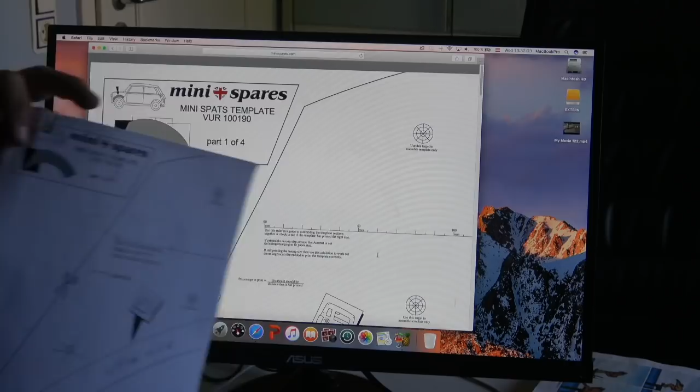So I've got here, you'll see this is the 4 sheets that go together. So here, sorry, it's not really good, the light. So here you've got the line where you cut down, so this is the bit you have to cut out, and it's showing you here where the holes should be.

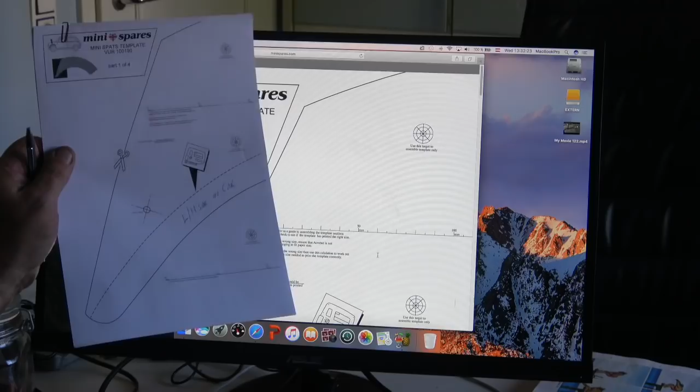And I tend to use those, but I also use the arch that you're putting on as well, just to double check it. And you might notice there I've put left hand side in car, so as you sit in the car you know this is the left hand arch.

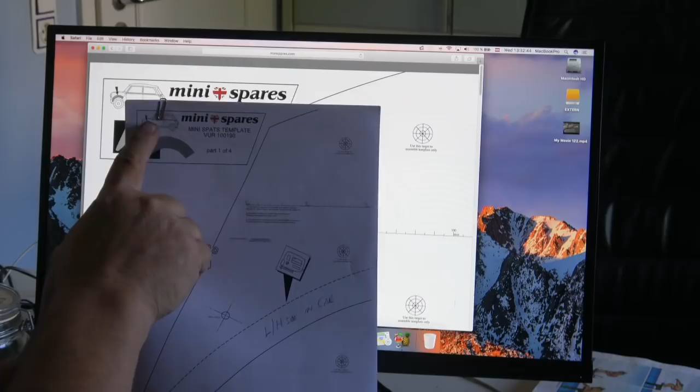The reason I put it in there is because obviously once you cut this, you can see that there is a drawing there of the picture, and you can see there's the left hand front up to the A panel. But if you've already cut this piece out, you don't have it, so it's always handy to just put it in so you don't get confused and put the wrong side and the wrong way around.

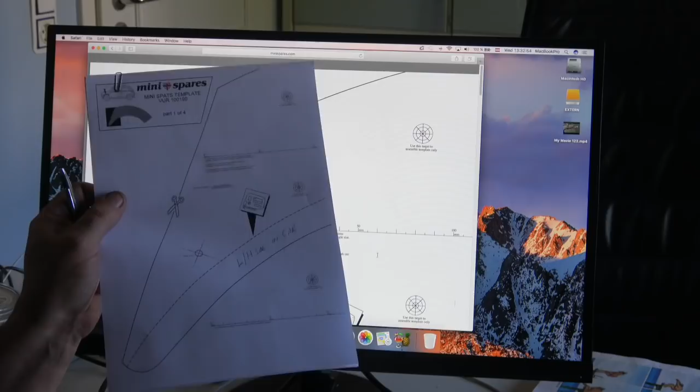Because again with this, it's measured 2 or 3 times and cut only once. Because once you've cut this piece of the arch out, that's it. You're committed, as it were.

And this is basically the A-frame of it. You can see it's the A-frame, and it's part 1 of 2. So there's 2 pieces that go on, and these are to line up directly onto it.

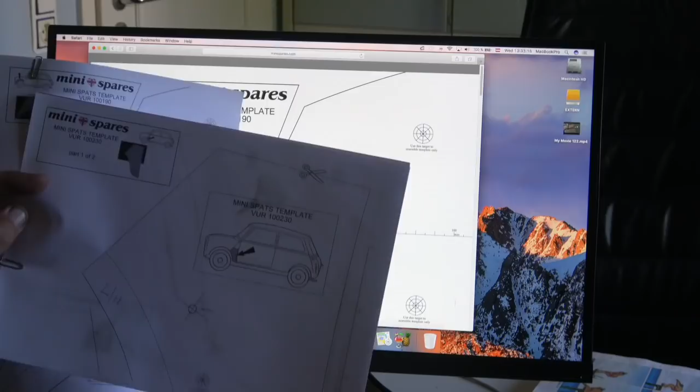That's how it's done. So what we'll do, we'll go through the whole process. The first thing you want to do is get your templates made and then cut out, and then I'll take you down to the workshop.

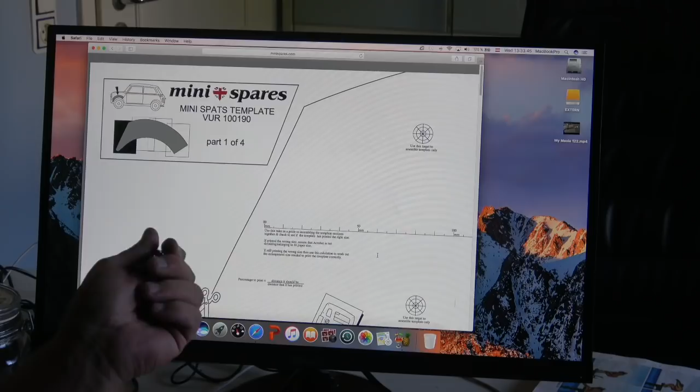The next piece will be, I'll take you down to the workshop, I'll show us marking this out, putting the strengtheners up against it just to make sure they fit correctly, the arch is correct. And then we'll cut them out and put them on and weld them in place, just one side, and it's obviously the same.

With the rear arches there's a bit of an issue, because if you take this to the rear arch, you don't need to cut. I'll take you on to the rear arch so you can see it.

There's nothing needs to be cut out on the rear arches, because on the rear they're fine. It's only because when you've got taller wheels, or 12-13 inch wheels, but you tend to have bigger, like 6.5, 7J tyres, and this is what catches on the front.

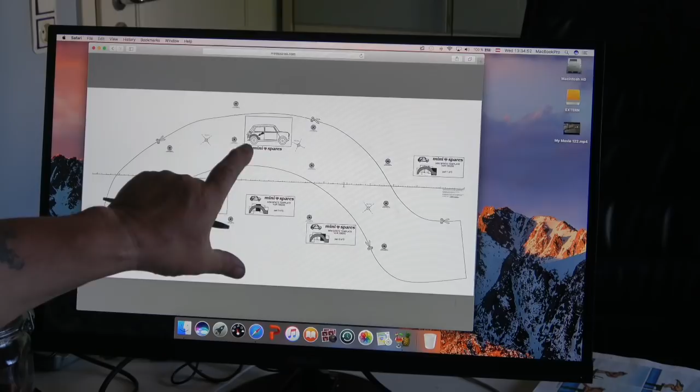So on the rear there's no issue because they're staying perpendicular to the car, but this is just to show where they should actually go. But the problem with this one is you have to scale it over, unless you've got a sheet that big, which is A2 or A1, whatever it is. To put it on an A4 sheet, you have to work out how you need to do that.

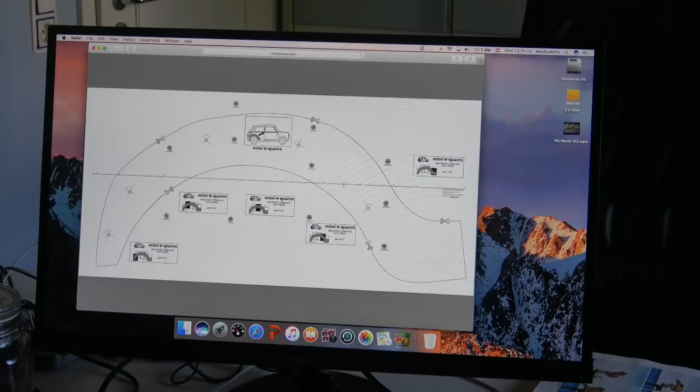But you don't need it, because I tend to use the wheel arches and fit them up myself, because the fitting on the rear arches are the most important, down here and here on the seam lip, and that's really where you need to get it right, to get the holes right for the attachments, and a lot of it's a little bit of trial and error. So that's the start of it.

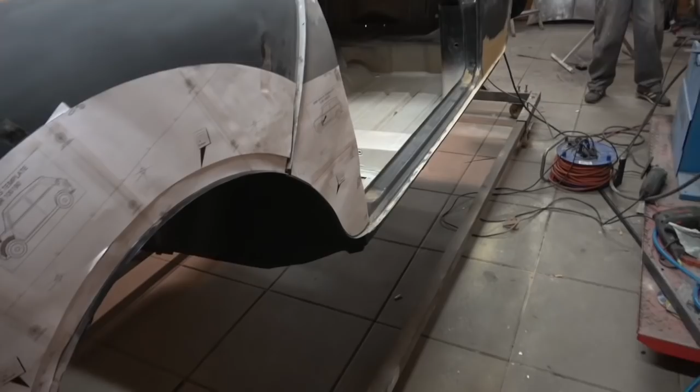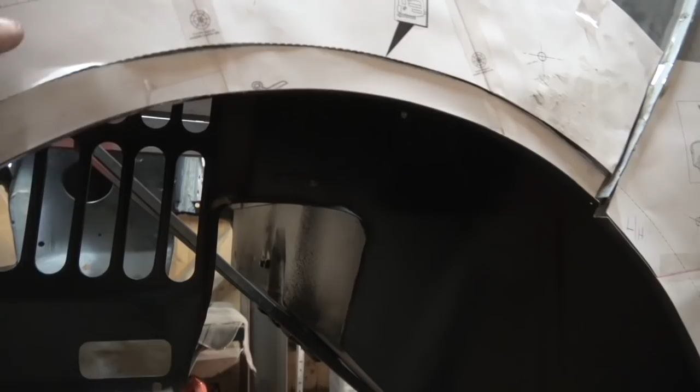Okay, so you saw me on the computer with a PDF file. So this is them all done, and you can see they're all lined up together there, all these points. So what I did was I actually cut this piece out, because obviously you need to make the line behind it, which we've already done. So you can see that's all in. You can see that's the reference point there and there.

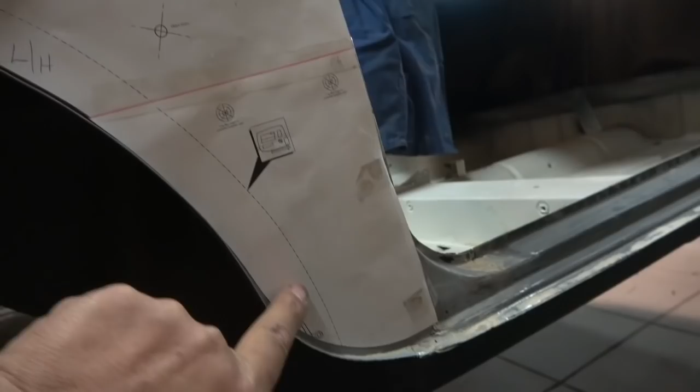So this one has to be cut out now, so we can draw a line into it. So I'll take this one up so I can show you. And then we don't need that one again. And you can see we've put a white line behind this one, up to there. So that's what needs to be cut out.

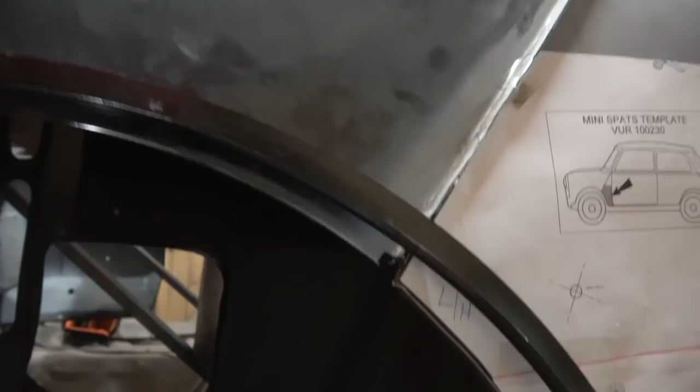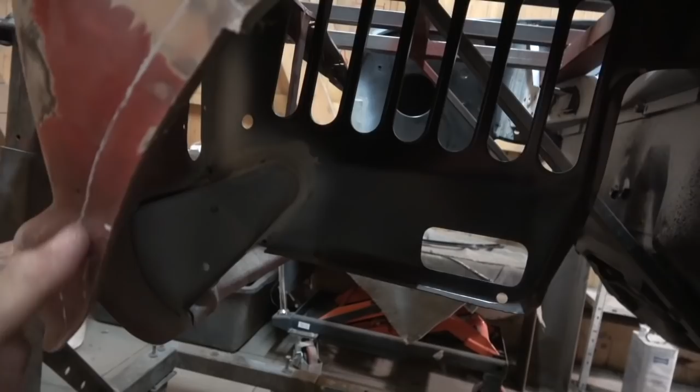And if you look, it's actually not too far off this. It's good, this is obviously just a strengthening. You can see how much more it needs from that. The other thing with this is, if you look here on the front, it gets a bit tricky - you can see there's a double bow there, and obviously this edging is not going to go around it.

So when you put it on, you need to get this absolutely central. Sorry, I'm trying to hold the camera as well. You need to get this absolute - hang on, I'll get Mia to hold it. Hang on, just grab my fingers.

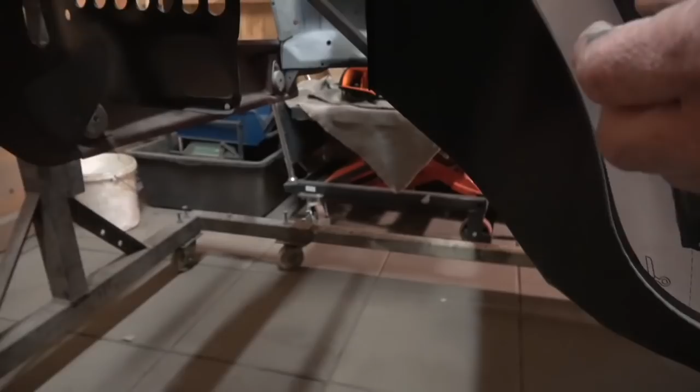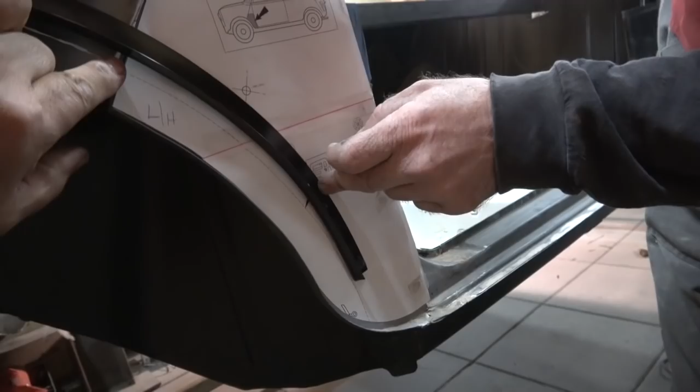So you can see here it can't go down over this piece, so it can only go so far. So you can see that obviously this bit's holding it up here. What we'll do is we'll cut this off, and then I'll cut this one out first. We'll mark that, and you can see that's how it's going to be. It's actually down a bit, but like that.

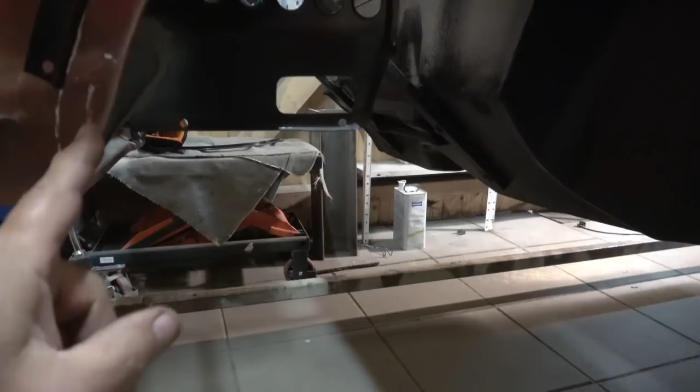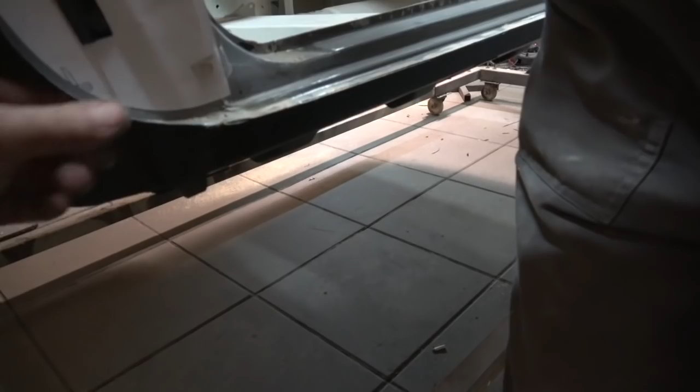But you can't go too far here because you've got to cut this piece out. But you can see I've made another little line there, that's enough to make the other returned edge and bring it round. On this bottom piece, what you find is you cut this piece out of the arch, and you can then put it - otherwise it comes down and it's horrible on this corner. So what I did with mine, the other car, is I took this piece out and filleted this corner into it, so I had a really nice shape when it was finished.

Right, so I'm going to get and we'll cut it out. We'll show you us cutting it out with the jigsaw.

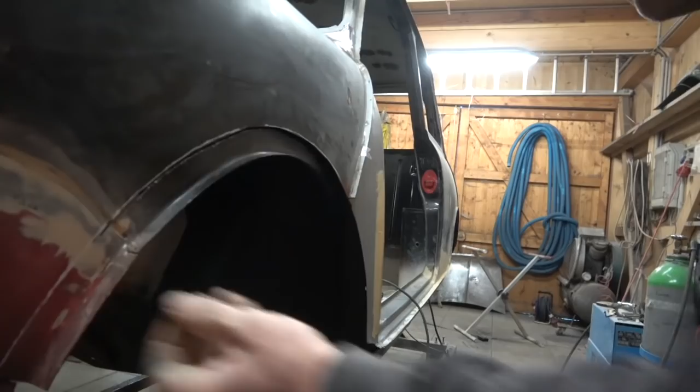Okay, see when you pull that, that's another thing - if you're doing this guys, don't pull the jigsaw right while it's moving, because it'll jag against the thing. Wait until it stops and then pull it out. So you can see this is where he finished off the lead loading for here, so this should be a beautiful end now, hopefully. So what we're going to do now is take that piece out, and we're sorted.

And you can see that's a pretty nice cut all the way through. I don't know if you want to - do you want to do it in one, or should we take the grinder to it?

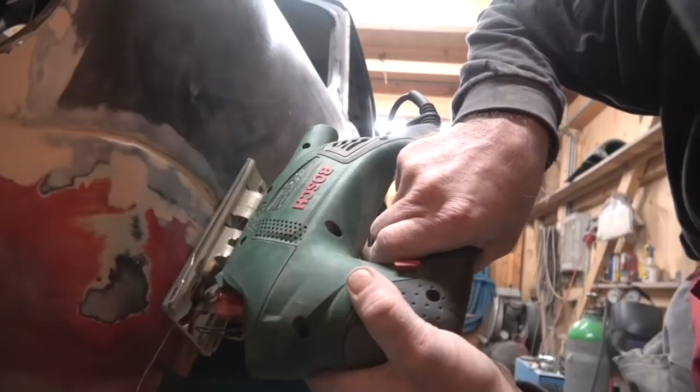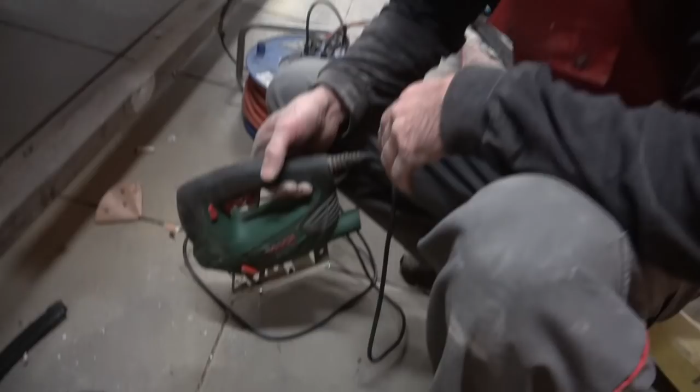See, wait till it stops, otherwise it'll jag backwards and forwards. And there you go, he's got it out in one piece. So you could, if you look at that and you look at the insert, you can see there's probably not a lot of difference, and you could use that.

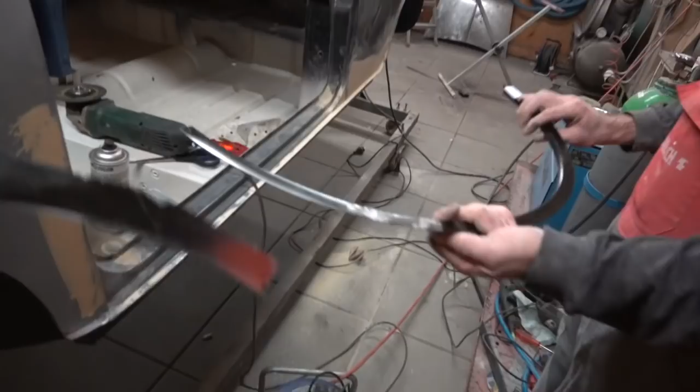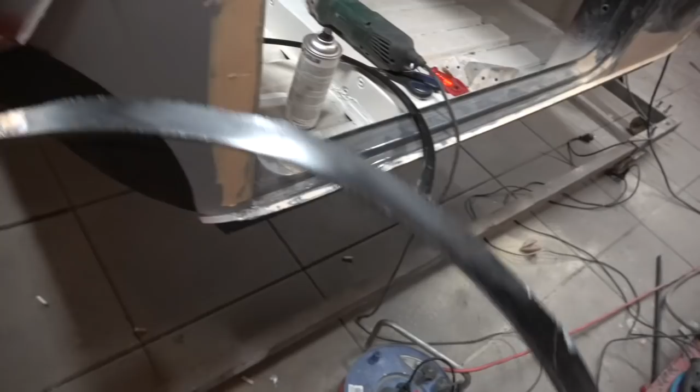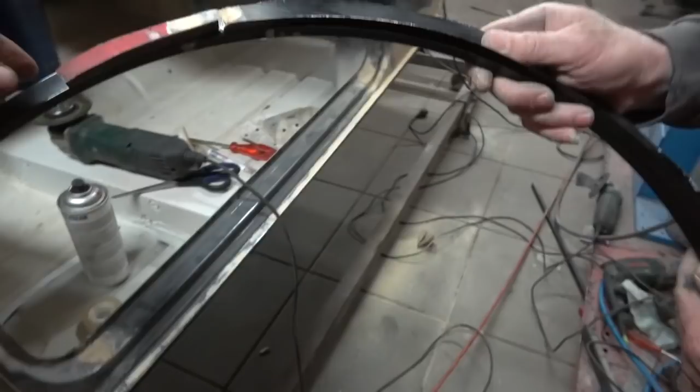But where the problem comes in, if you cut this out where you've already got these pieces here, you're going to end up with 3 pieces. So putting that back behind its own self is not going to help in the rigidity here or here. So if you pick that one up, you can see the difference there - you can see how much is missing off it, and unless you join them all up, which would be very difficult to get the arch on, I reckon.

So now what we'll do is you'll just fit this in to show you, bearing in mind this piece here, so that's going to go - it still must be inside. Yeah, it's still got to come off that, but it might go inside. There we go, so this is just a little bit too long maybe. There we go, oh it's okay. No, it's not too bad.

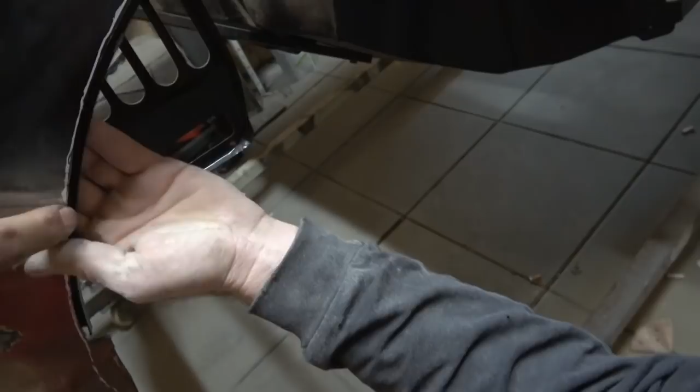Now, what's wrong there is that lip inside has to be cut up to take this piece. You can just drop this down. You see this piece here? That piece now, we just need to take that lip off inside. I'm sure you can't see it, but anyway, we'll put it in and let you see it later.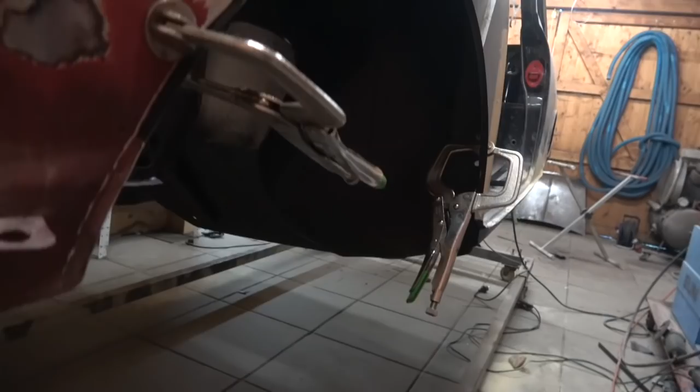Okay, so we've cut it all out. You can see the arch fits really nicely. There's hardly a bit of a gap there, but we will lead load that. The extra piece that I took off I showed you, we've just bent that round with a pair of pliers. It's not even dollied yet, you can see it's not quite right, but that's just with a pair of pliers, and you can see how the edge comes all the way up onto the new one.

Amir's going to show you the strength that's in that now. Obviously that's only got 2 clamps on it, but you can see how strong that is. Now he's going to take the clamps off, and watch this when he takes the clamp and the extension out.

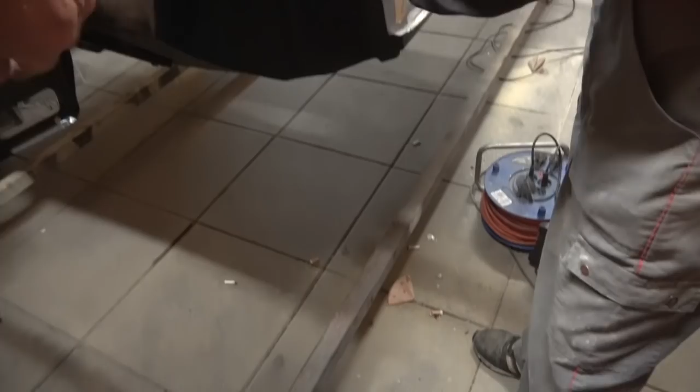Right, so now it's open. You see that? And that's all welded together, but look how that bounces in and out. Hang on, you can see there's no strength in that whatsoever. And this is all welded in place. But the A-frame is not too bad, here there's an awful lot of flex in them.

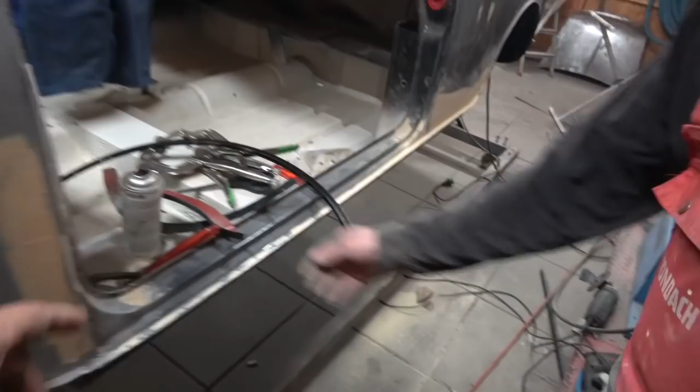As I said, you could use this other piece, but this piece we're going to do now. Can I just put that back in again? I'll just show you this piece. So this is what you end up with.

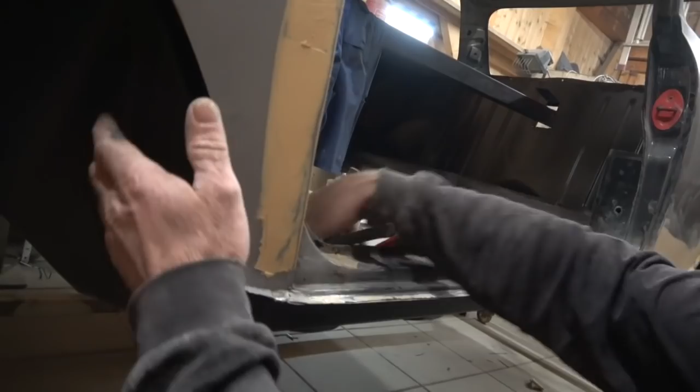He's going to put the clamp back up again. So this is what you end up with here, and you can see it just doesn't look right. It comes straight down and then it's here.

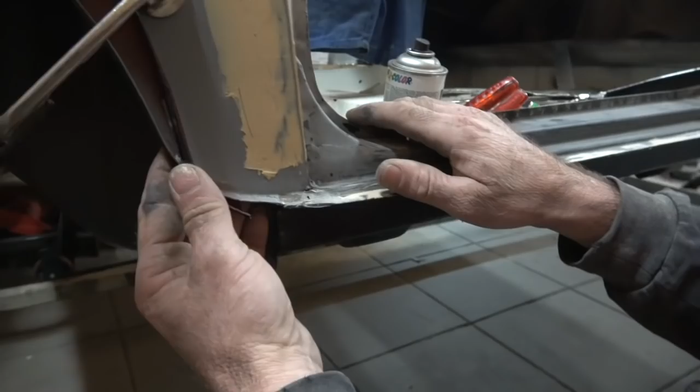So what we'll do now is what we did on my other Mini. We'll cut this piece out here, the nice piece, and make a nice round bridge so it looks nice, even though it's under the arches and it's hidden. It's just a nice way to finish the job and do it a bit pro. So we'll take the best part of the arch, it's at this end, and then we'll clean this up and pop it in there.

We'll just insert it in, and we'll show you when it's done. So if you could just take this out for us. So on this strengthener, you can see all around the edge. What we'll now do is punch holes all the way around this, all the way around the side, and then we'll weld it from the inside of that wing.

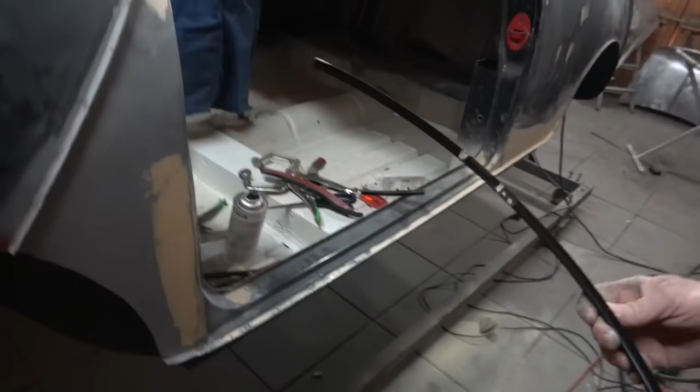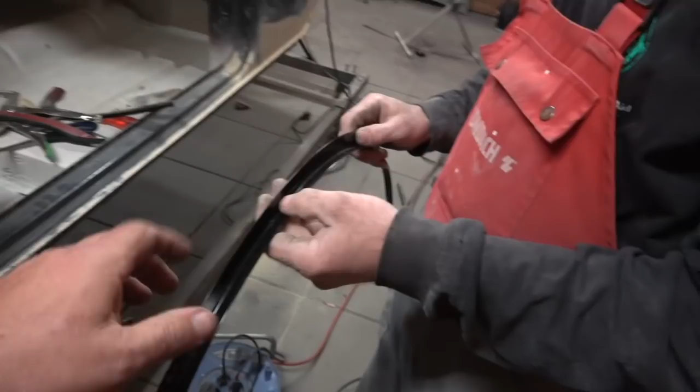We'll turn the car over. This is a great thing about having the jig. We'll weld it all from the inside, so nothing will be seen on the outside. And then that edge there, we'll pop that back in again. You can see it fits nicely up against there, look.

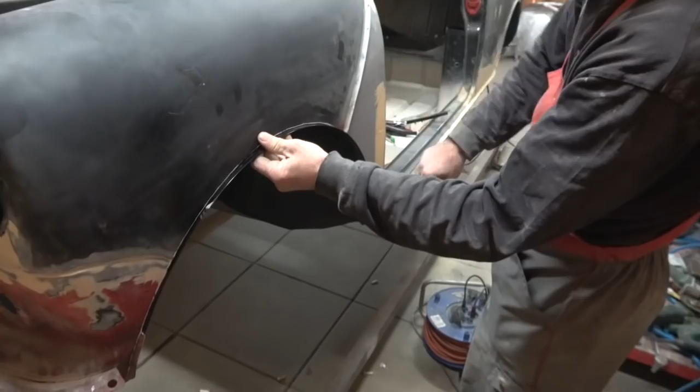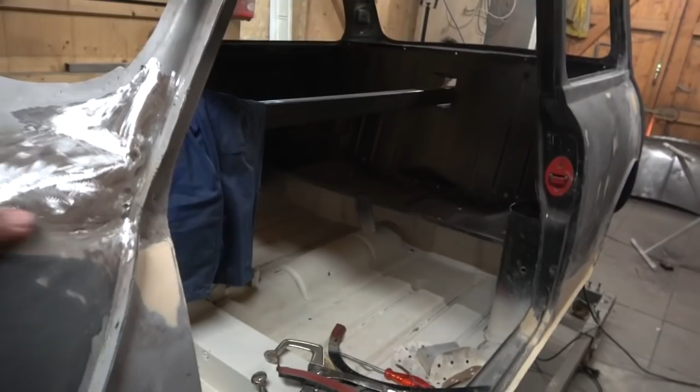When that's in, then we'll turn the car on its side, and we'll just drop a little bit of lead in there so it's solid as one piece. So that's it for this one, and Amir will be doing his lead loading lesson for you guys. He's finished off the front, but he'll do some more here. You can see he's been lead in there, but he'll do some more and show you how he does it, or how we do it.

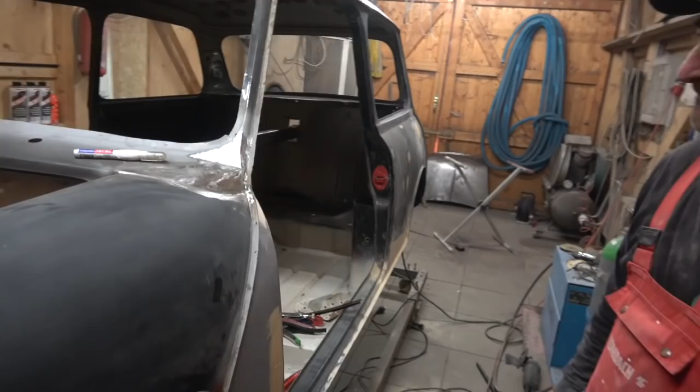Once you've done it once or twice, or maybe 3 or 4 times, you really get the hang of it. And it's just really working with gravity. Piece of cake, yeah, it is now.

So anyway, we'll catch you on the next video and show you what it looks like when it's welded in. Obviously I won't do the other side because it's fairly obvious. It's the same thing but the other way around, side by side.

So take care. Keep safe. Stay safe. Keep the faith. That's the one. Bye. Bye.